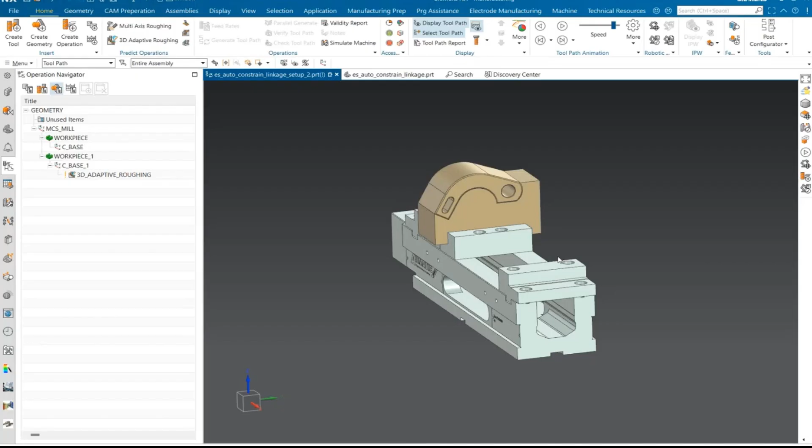Alright, so here I just created a 3D adaptive roughing, the 3-axis rough operation just to see the difference, like we used to create this type of 3D adaptive roughing with the 3-axis movement. Now let's take a look at our multi-axis rough operation, available under the mill multi-axis operation subtype, the first icon being your multi-axis rough. It's the general purpose rough milling operation that cuts in multiple levels. You can use ball nose, bull nose, and flat end mills. We'll also take a look at the patterns available here.

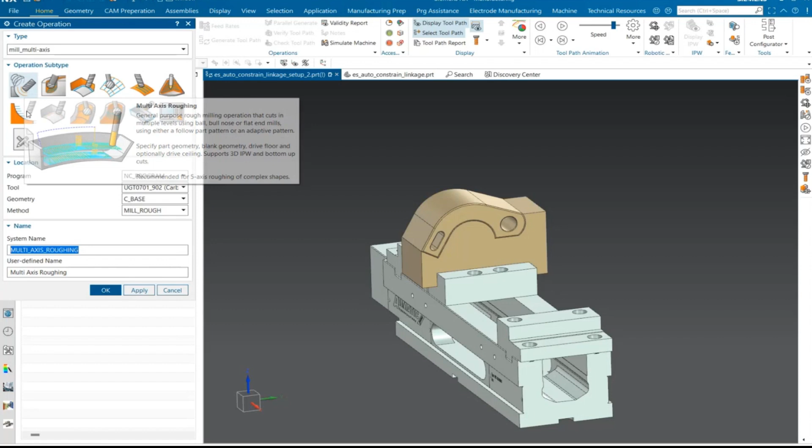For this, we need to specify part geometry, blank geometry, drive floor, and optionally drive ceiling. The ceiling is nothing but the top surface of your blank, and it also supports 3D IPW and bottom-up cut. So let's go ahead and take a look at it.

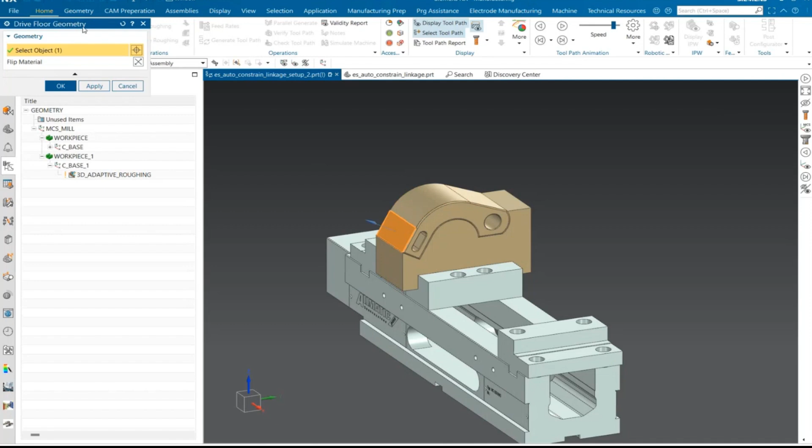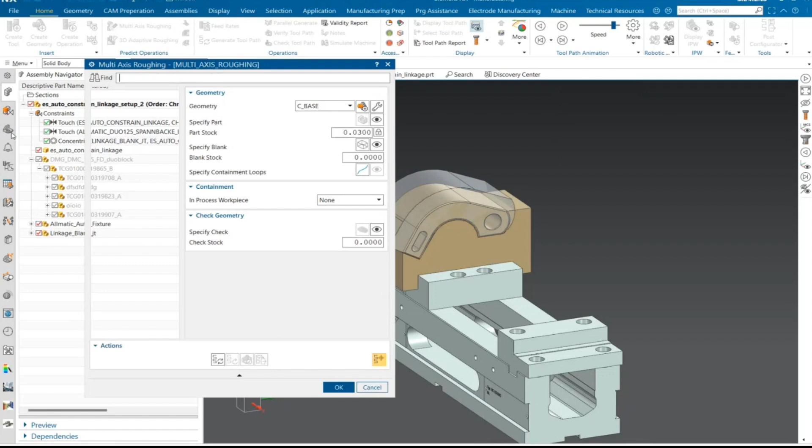For the drive surface, we cannot define multiple surfaces here, so we need to create a single surface if we want to rough out the entire part. But I can show you by selecting one of these surfaces for now, and let's generate by changing the pattern to zigzag. I have a blank ready over here, I'm going to define that blank. Let's generate and see what we'll get. As you can see, since I selected only a single surface, it's going to only follow that single surface.

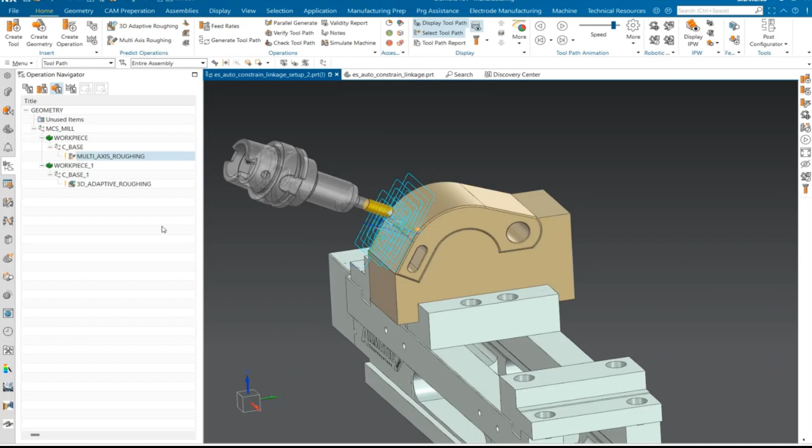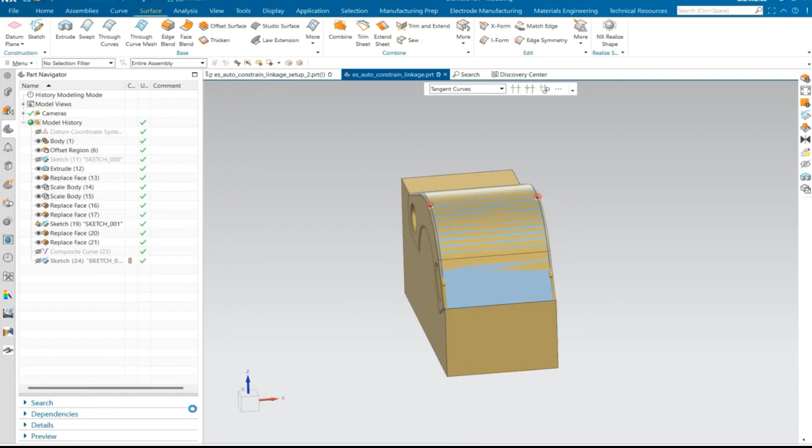But if you want to create an operation for this entire part, we would need to create a single surface. So let's go back to our master model and create a surface over here. I'll go with the through curves option, take this curve and add a section, take this curve, and I have my surface ready over here.

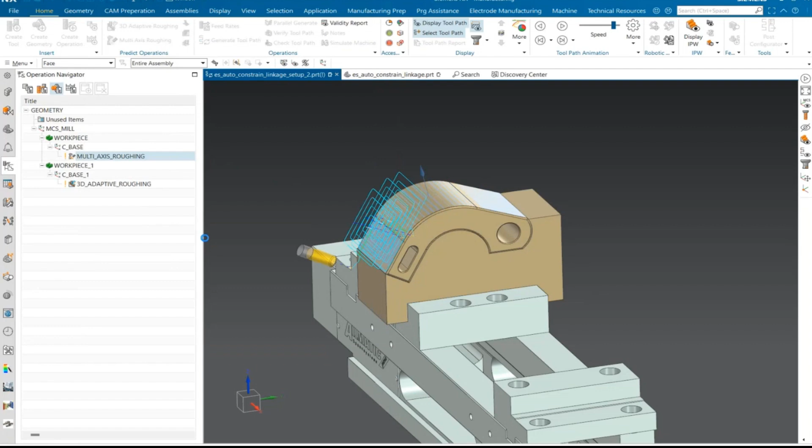Let's go back to our setup file, and as you're aware of the master model process, it downstreams the changes we made to the master model. Since we have that here, let's select the new single surface as our drive floor geometry, keep those options the same, and generate to see what we get. Now you're able to see the toolpath follows the entire surface that we defined.

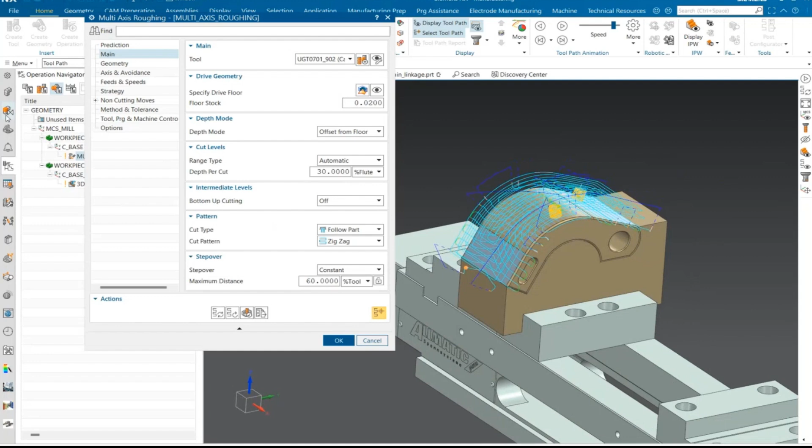Since we have that, let's go ahead and take a look at the simulation, how does it look. Let me switch on my machine and let's simulate.

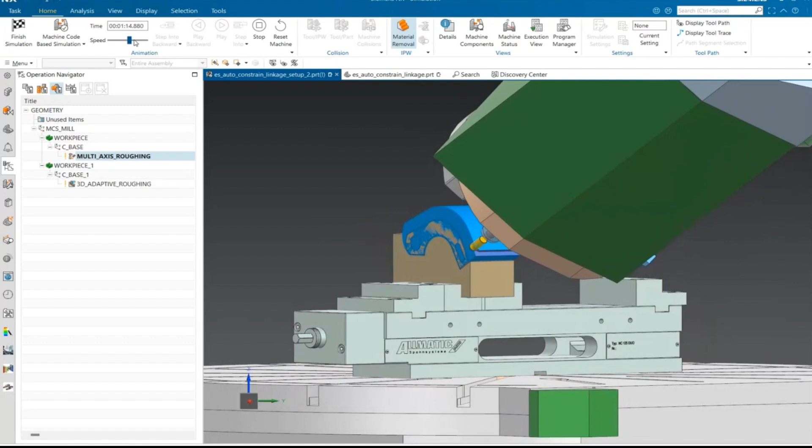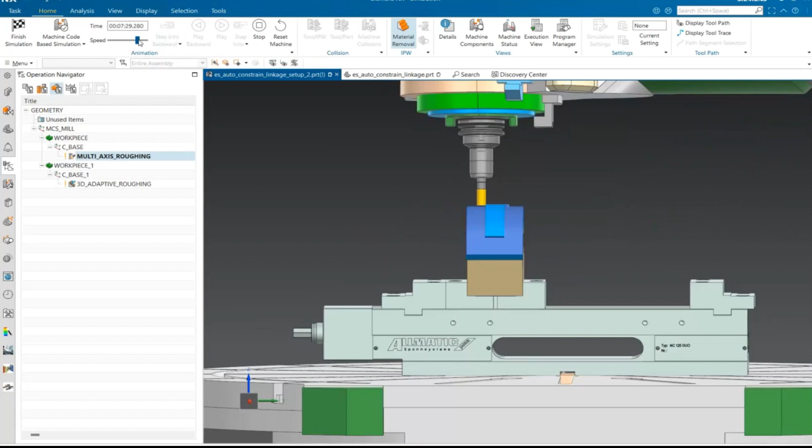Now we're using the same roughing operation, but using the multi-axis option, we're able to machine this entire curvature of the surface, just by creating a multi-axis rough operation and defining those two different things: a drive floor geometry and also a depth mode. As you can see over here.

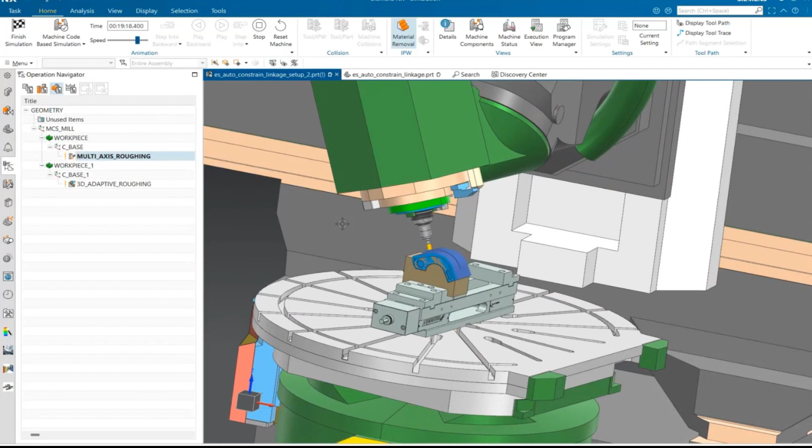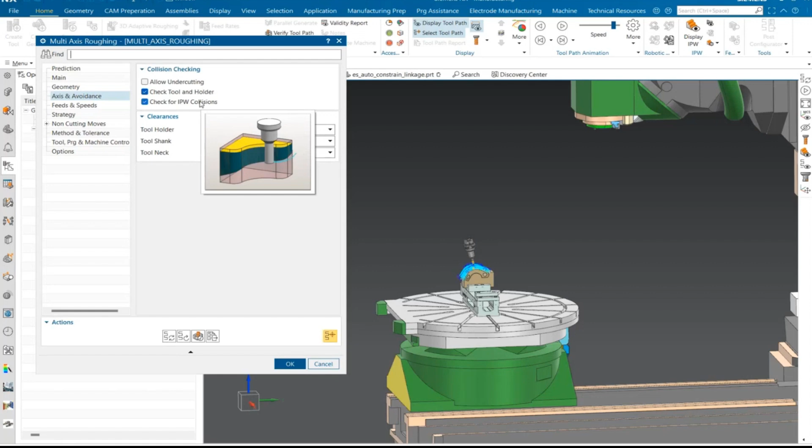So let's go ahead and see what other things we have with this operation. For this, we do not have any tool axis that we need to specify, but this also supports collision checking options. The strategy is the same as what we saw in cavity and 3D adaptive roughing operations, the cut order and cut direction. The only new things in these operations are the drive geometry and the depth mode.

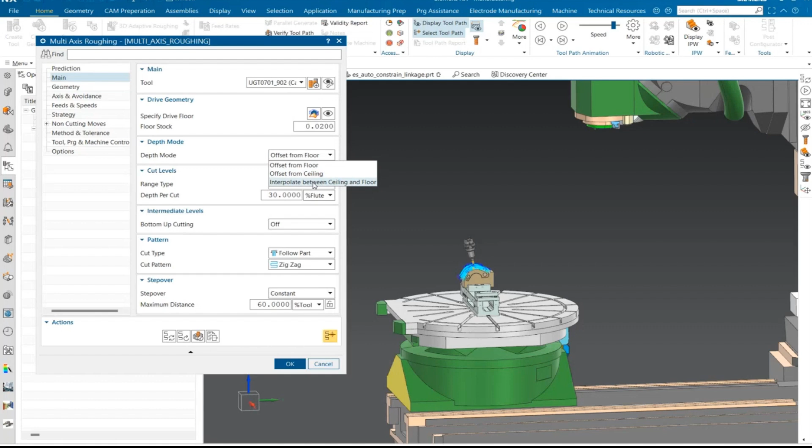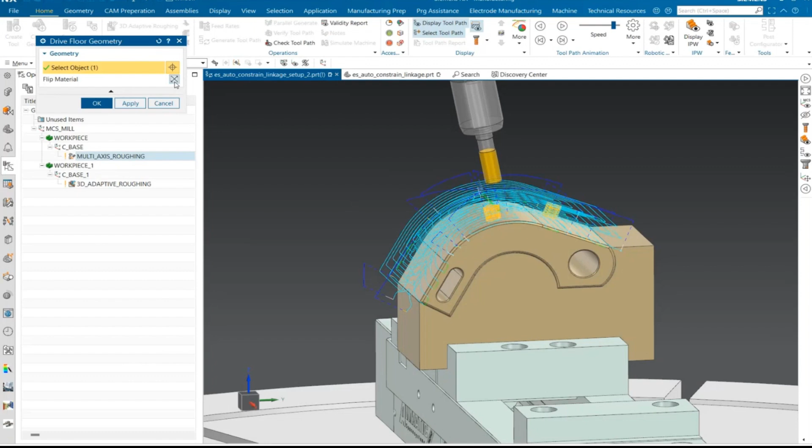In the depth mode, we have two other different options: one is offset from ceiling, and the other is interpolate between ceiling and the floor. Let me show you one of these options, I'll select interpolate between ceiling and the floor. It's ideal for parts with intricate shapes, undercuts, where deep cavities are present and traditional three-axis operations might struggle. That's where this roughing operation comes in really handy.

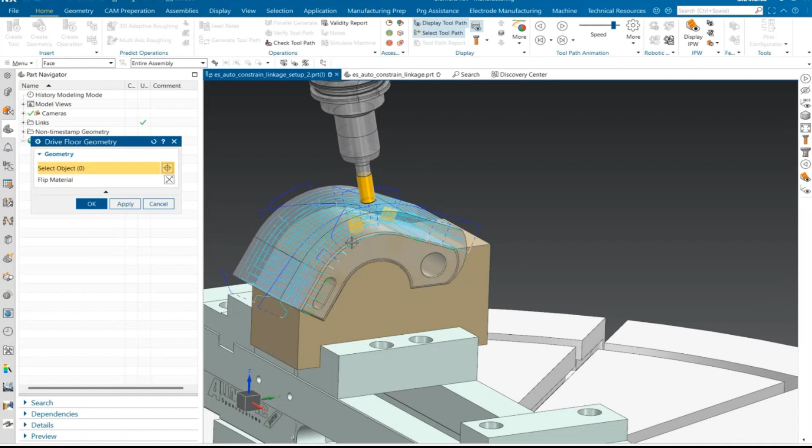For now, I'm going to deselect that face and select this face over here as my drive floor geometry, and for the ceiling geometry I'm going to select the same part of the blank, and let's generate and see how the interpolate works in the multi-axis rough operation.

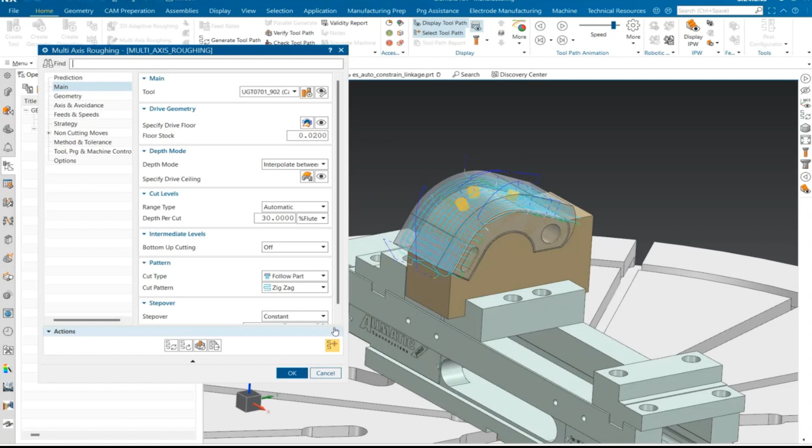Now you're able to see how the interpolate between ceiling and the floor works. It's cutting in a different way, but the floor has been cutting more over a spiral pattern.

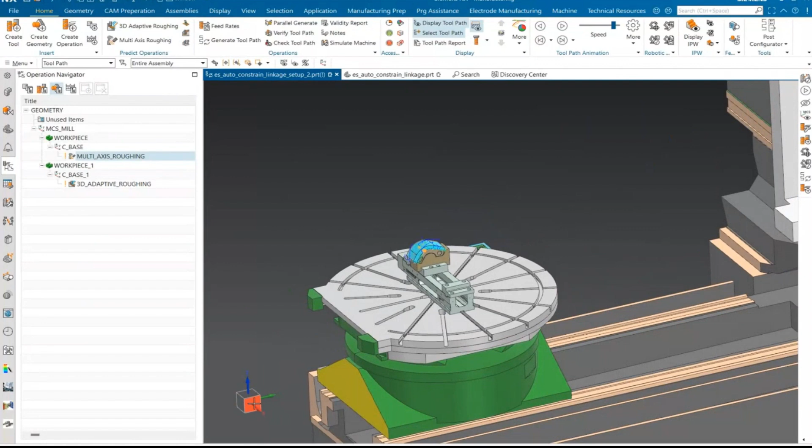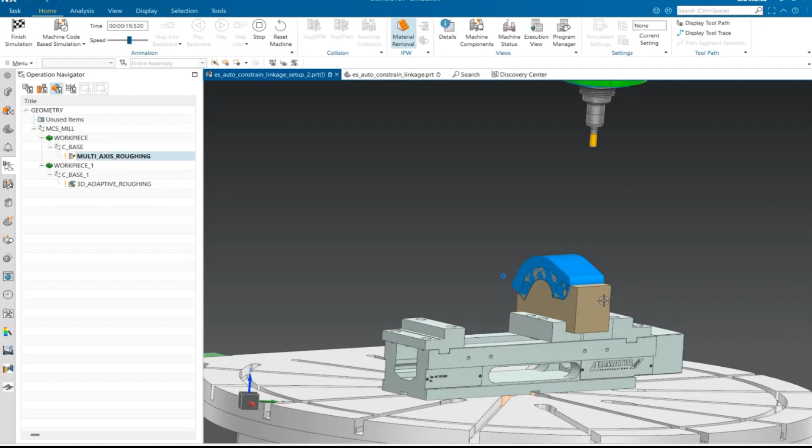Let's check the simulation of this operation, how does that look. The toolpaths are really smart too, they optimize the cutting process so the tool doesn't get overloaded, which means your tools last longer and you get a smoother machining process. On top of that, it cuts down the machining time because it avoids unnecessary moves and keeps everything streamlined.

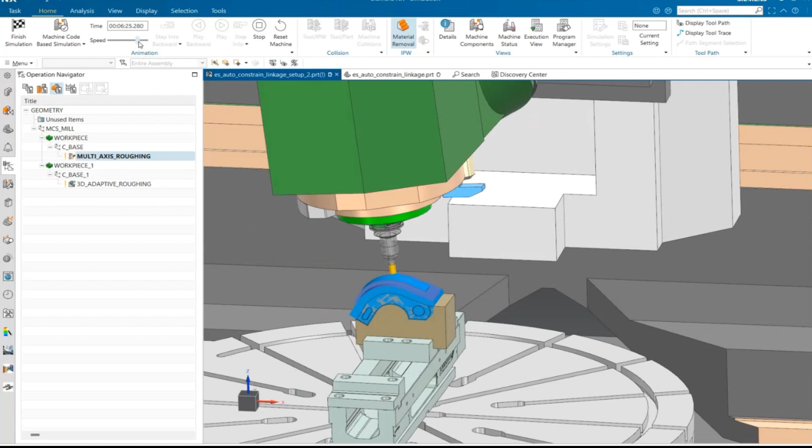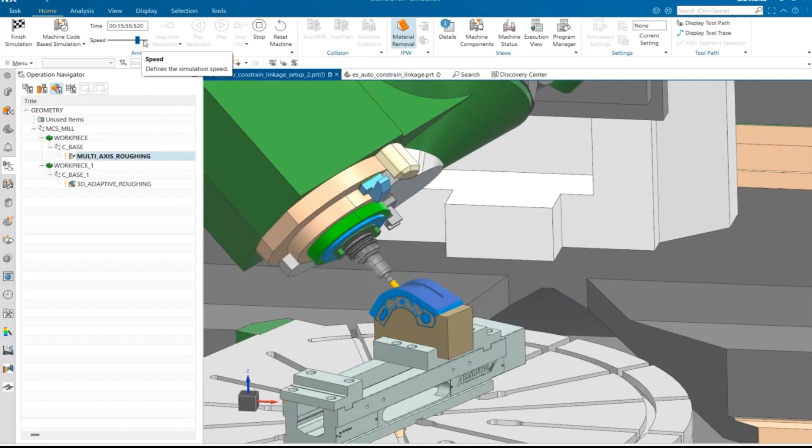This way you can create your multi-axis roughing operations, and it doesn't have any complicated things to define. It looks the same as our three-axis roughing operations, like I said before, for the cavity mill and adaptive milling. You also don't need to define any tool axes or projection methods like we have in finishing operations. Just define the drive floor geometry or your ceiling geometry, like the top of the blank, and then you're all set and your multi-axis roughing operation is ready to use.

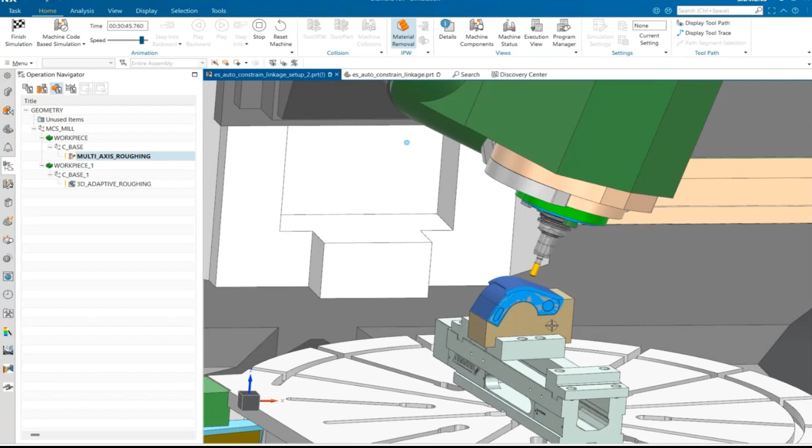Overall, it's just a game changer for getting the roughing done faster and with less hassle. Perfect for everything from aerospace parts to molds and dies. Once you start using it, it's very hard to go back to anything else.